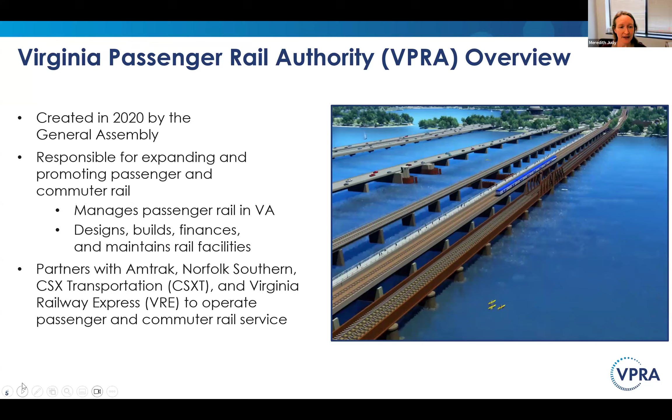Next slide. A main focus of Virginia Passenger Rail right now is what we call our Transforming Rail in Virginia Capital Program. One of the main focus areas is between Washington, D.C. and Richmond. We have 11 major capital projects underway in that segment. With those improvements, we'll be able to provide significantly more rail service, more rail opportunity, and also create more dependability in the schedule. Today, we'll focus on two of those projects, the Franconia Springfield Bypass and the Franconia to Lorton Third Track. And of course, we have Jason here today talking about Virginia Railway Express's Franconia Springfield Station project.

Virginia Railway Express is a key transportation connector in our region. It has two lines, the Fredericksburg line and the Manassas line, with 16 daily trips on each corridor. It connects our Northern Virginia communities into the commercial core in DC. Next, I'll pass it to Geoff.

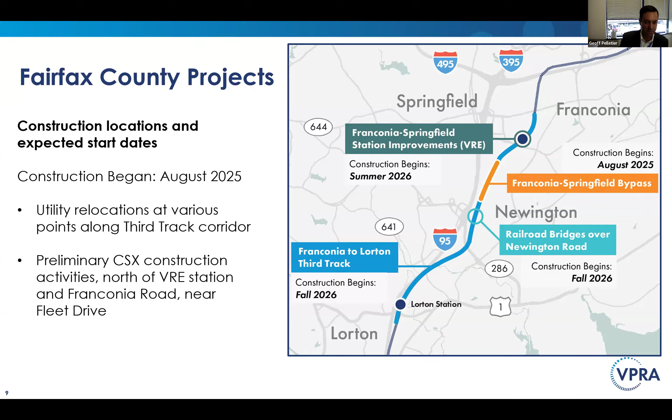We do have elements under construction on the bypass and third track projects. Much of that early work is focused on things like earthwork, grading, drainage, and stormwater protections. That gives us the foundation to build our bridges, our walls, and ultimately the track structures.

The early work underway at Fleet Drive is part of the overall plan to retire the Ravensworth interlocking. That's a network of crossovers, switches, and signals that exists behind the Loisdale Estates neighborhood, which we plan to move up north and convert back to straight track behind Loisdale Estates.

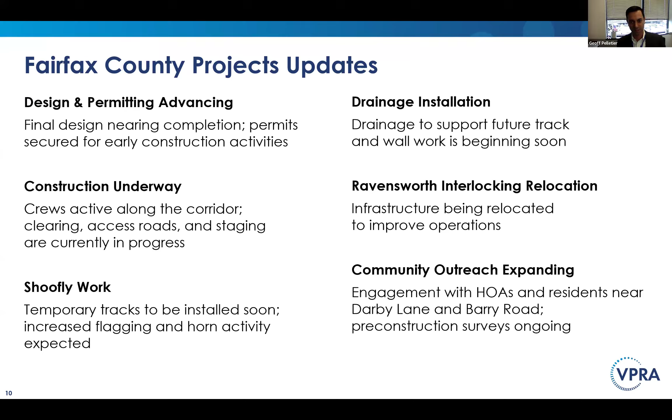We're going to continue our community outreach in the corridor. That includes this meeting, engagement with the adjacent neighborhoods, and in some cases, direct coordination with the homeowners immediately adjacent to the work.

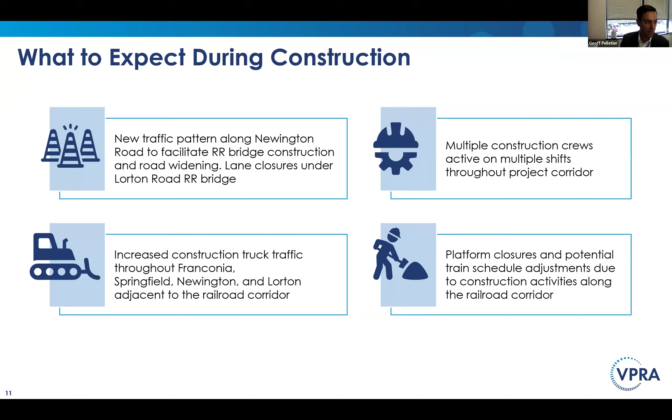We expect to start construction on temporary tracks known as shooflies in the next few months. Adeel is going to describe those in more detail in just a minute. Those of you who live close by will see a lot of earth moving and grading happening in the near term, as I mentioned.

We'll be working on some retaining walls in the corridor, and we've actually started some of that work just adjacent to Loisdale Estates. I was out there yesterday, and we saw some of that work going on.

Throughout construction, we expect there will be a good amount of work in that Barry Road cul-de-sac area, not just for construction access, but there actually is permanent construction work that will take place in that area. We're going to be relocating a sanitary sewer that crosses the cul-de-sac.

We have a retaining wall that will be supporting the future third track in that area. And VRE is going to be constructing a pedestrian tunnel to access the new reconfigured Franconia Springfield station.

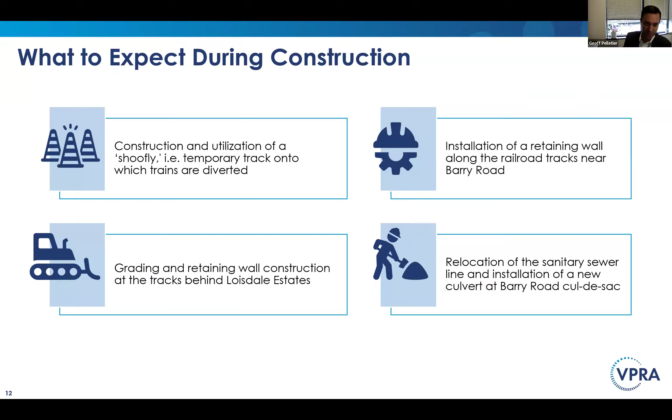Since the initial CAG meeting in August, we've ramped up our community outreach this fall. We did neighborhood tabling events at Windsor Estates and Loisdale Estates, a public meeting for right-of-way acquisition for the third track project, door-to-door flyering, direct mail distribution, and we're in frequent contact with Supervisor Lusk, Supervisor Storck, and their teams. We will continue our outreach in the coming months, and we're always available if your organization or neighborhood has questions or concerns.

We can't deliver these projects without coordination from our partner stakeholders in the corridor, including VDOT, WMATA, Fairfax County DOT, Fairfax County DPW, and the Fairfax County Park Authority. At a minimum, we're talking to these organizations monthly, sometimes much more frequently. In fact, just about an hour ago we had a meeting with Fairfax County, and we've been talking with VDOT all week to try to finalize our plans for the Newington Road bridge replacement. So a lot is going on at all different ends of the outreach effort.

So with that, I'm going to step aside and pass to Adeel. He's going to talk about the bypass project and some of the specifics about our railroad work zone safety.

Geoff mentioned a shoofly. So what is a shoofly? The easiest way to describe it is basically a detour. Unlike road detours, you can't just take another street with the railroad. So what we have to do is build these temporary tracks, shown in purple or pink, adjacent to the existing track, to basically detour the trains around.

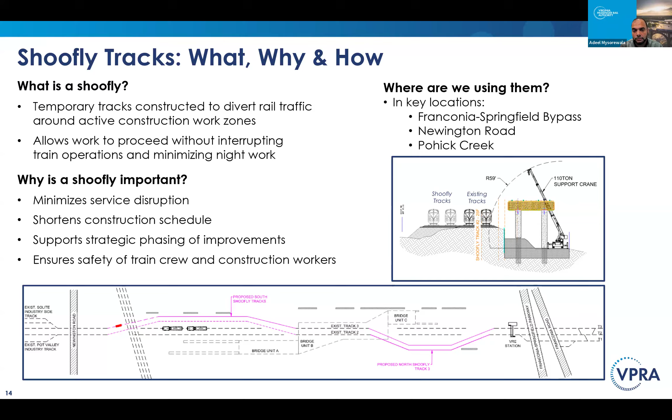As Geoff mentioned, construction has started. You'll hear construction happening, primarily trucks coming in and out of the site, like at Barry Road. Excavation is starting, so they're going to begin taking soil out of the site. You'll hear excavators, you'll hear bulldozers, and we'll be drilling very soon, so you'll start hearing that as well.

And then, just on a construction site, there will be trucks with their backup alarms. We have what these noise levels sound like shown on the screen, just to give you an idea of what it will be like out there.

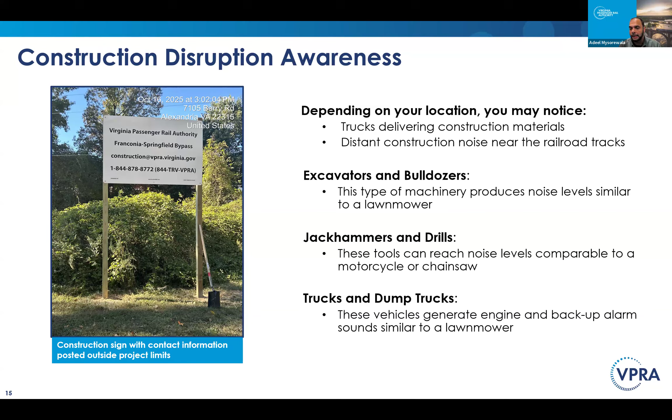So we want to talk about safety in the work zone and the impacts to the community due to safety in the work zone. It's a federal requirement that we follow to provide safety in an active railroad corridor. This means we have a flagman on site managing train operations in the construction area. His job is to ensure safe operations through the area, making sure equipment is out of the way of the train when it passes through. This is required by federal law. The goal is to ensure safety when crews are working near active track, while maintaining train operations.

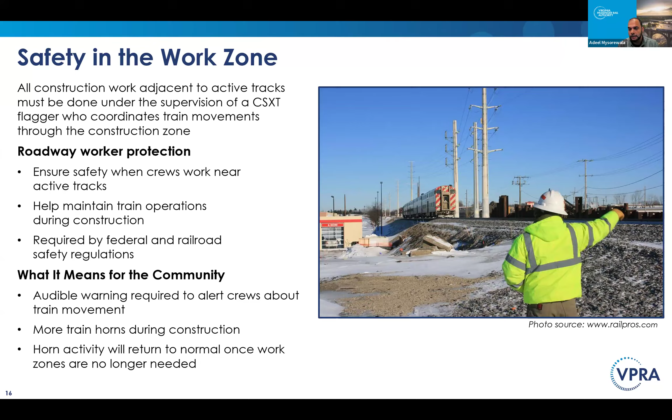We don't want to delay trains, because a lot of people use these trains to get where they need to be, and a lot of goods travel through this area. For the community, part of this regulation means trains have to blow their horn when they go through this area. So you're going to hear more horn noise when work is ongoing. You've probably noticed that already, right? These horn noises will go back to normal when construction is complete, or when the flagman is no longer needed.

So a quick update on the project schedule for the bypass, and then I'll hand it over to Sarah to talk about the Franconia third track. For the bypass, like I mentioned, we're already in construction. Contractors have mobilized, and I'll talk a little later about what's actually ongoing on the bypass project. Thank you, Adeel.

Regarding the Franconia to Lorton third track, as you can see on this calendar, we've just finished our 100% design. We're currently working on information for bid documentation, which I'll touch on later. The big piece we're working through right now is property acquisition, and we're hoping to move into procurement in early 2026, then eventually into construction, which should be completed by the end of Q1 2029. Right now we're closing out our permitting requirements and some pre-construction activities for this project.

Just a quick reminder about what Franconia to Lorton third track is, for those who may not have been at the first CAG meeting. It's the construction of an additional 6 miles of a third mainline track between Alexandria and Lorton. It will create a continuous third track corridor, allowing for more train traffic to occur. As part of that, there will be construction of railroad bridges over Newington and Lorton Road, and other infrastructure like drainage facilities to accommodate the additional third track.

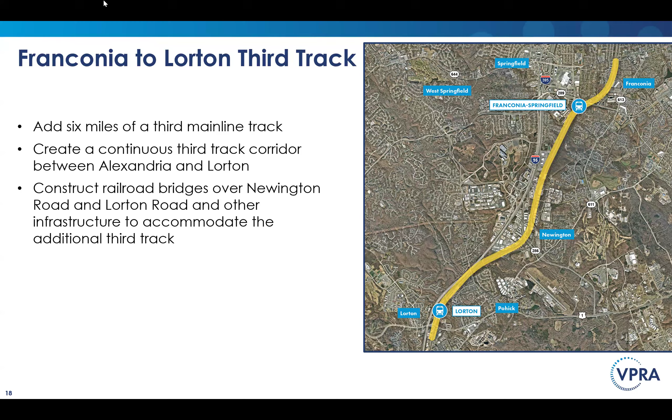It's showing that it's... Oh, it switched on my end. Okay, I just would—

Thank you. So to touch a bit more on the railroad bridge improvements I mentioned, there will be new construction at Newington Road and Lorton Road. Two other bridges being improved are across Accotink Creek and Pohick Creek. For Newington and Pohick Creek, we are constructing a new railroad bridge adjacent to the existing one, and we are also removing and replacing the existing railroad bridge — a full tear down and replacement.

At Accotink Creek and Lorton Road, we are building a new railroad bridge adjacent to the existing railroad bridge, so those involve a little less work.

For a progress update on Franconia Lorton third track, we currently have field crews out and active on the corridor, specifically tied to our early works package. These are not specifically for third track overall, but prep work needed for us to facilitate the construction of third track. So you may notice increased activity, specifically track and signal equipment installation occurring in certain areas.

Recently we completed our 100% design comment resolution phase. We've finalized our plats for right-of-way acquisition and are currently working through the appraisal process. We also completed, as part of the early works package, some drainage and grading civil work. What we currently have ongoing is appraisals.

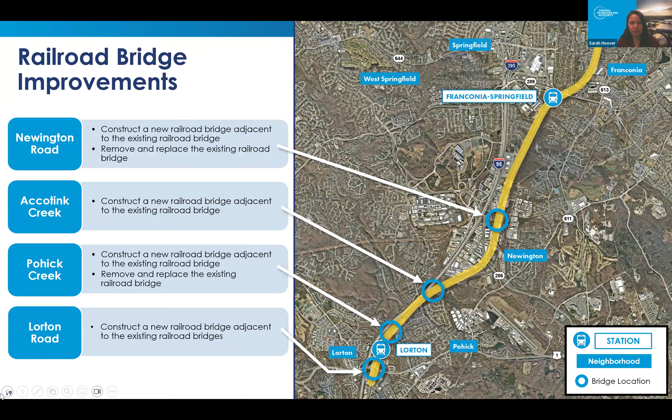As I mentioned, we have an early works package currently underway. We're working with CSX to remove an existing interlocking at Ravensworth, near Jerome Street and Darby Lane. We're relocating that interlocking to milepost 99.5 on the main line, called Control Point Beltway or CP Beltway, near Fleet Drive, north of Franconia Road. That interlocking is a rail junction where tracks merge, with numerous switches and signals being installed, allowing more train movement between the first, second, and eventual third track. This is needed for safety improvements and operational efficiency, so we can take advantage of the third main line, and to allow for the shoofly construction mentioned earlier.

As I noted earlier, that civil work has already been completed. That is what I'll show you in the next couple of images.

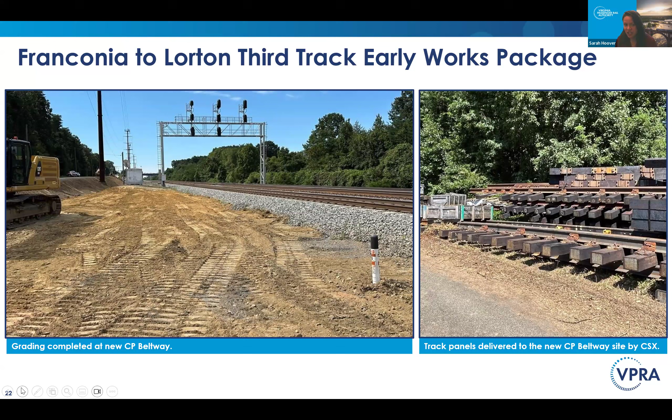For those of you near Fleet Drive who've seen construction in your area, this is what you're seeing. On the left, we have grading that's been completed near the new Control Point Beltway. On the right, we have switch or turnout panels delivered as part of the interlocking construction. They haven't been assembled yet, just staged there for construction in January.

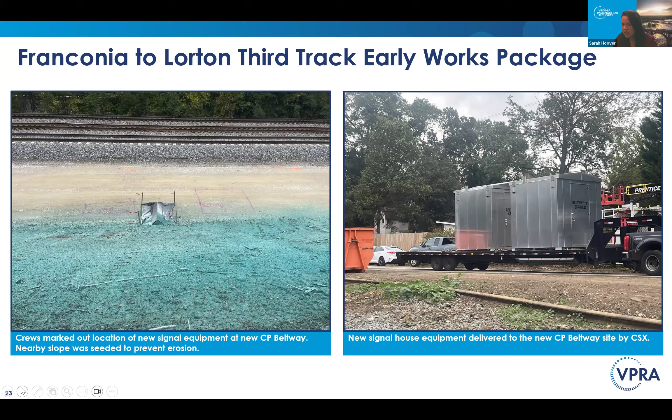We also have signal work, as mentioned. On the right is the signal house equipment being delivered, and you can see where crews have marked the location in the field for the new installation. We've also been seeding the nearby slopes where civil work occurred, to minimize erosion to the best of our ability.

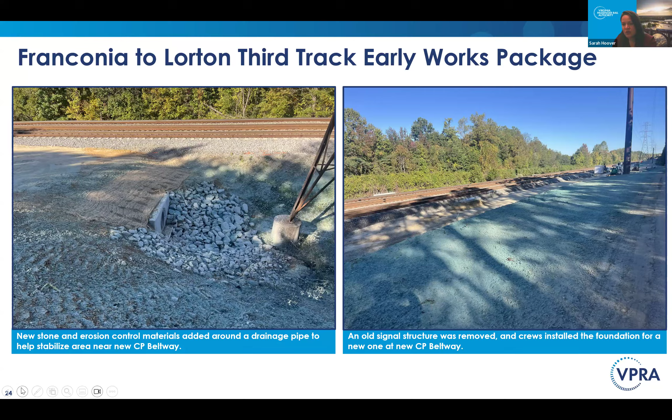So those are the updates for third track. I'll go ahead and hand it back to Adeel to discuss the bypass.

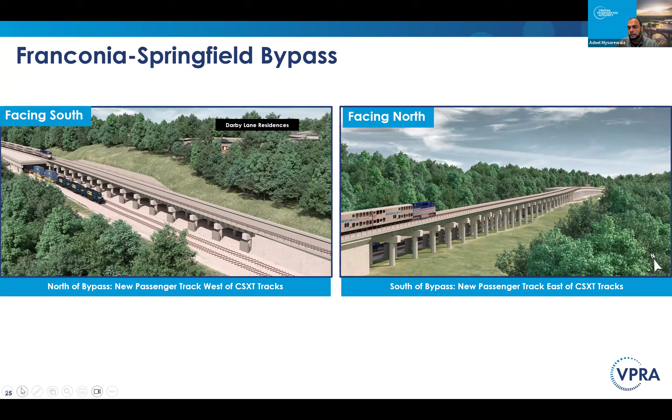As mentioned, we are in construction right now. The contractor has mobilized and gone through initial site setup. We've had kickoff meetings with the Department of Environmental Quality, and a site walk with them as well. Access road construction has been completed, and we're finalizing final engineering plans for the project.

Ongoing right now: brush clearing, site survey, erosion sediment control installation - I'll have pictures to show you what I'm talking about. We have utility relocation coordination ongoing, as well as a lot of equipment and delivery happening right now, and construction of railroad crossings for access. I have pictures of that as well later.

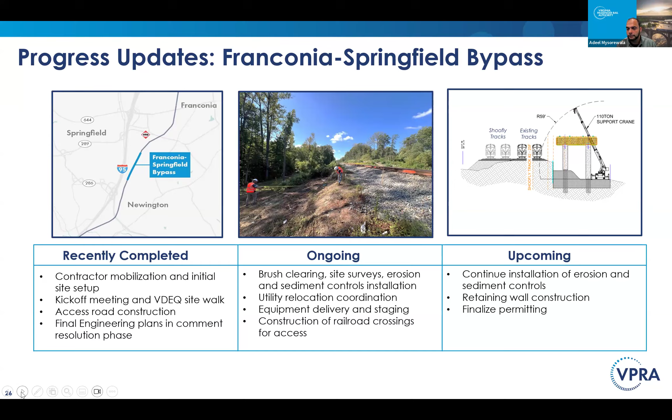What's coming up: we're going to continue installation of erosion and sediment controls, and the major activity you'll start seeing is retaining wall construction - the excavation for that has already started. We also have to finalize permitting for our final engineering phase as well.

So I wanted to talk a little bit more about construction access at Barry Road. I know it's a very busy slide right here, so I'll describe some of these colors.

The orange is the construction access that our contractor is currently using for the Franconia Springfield bypass project. What they're going to do is build a new culvert and then switch over to the blue access path, which provides better access and avoids that sharp turn we have.

Also, VRE is going to come in next and start building the pedestrian tunnel shown in purple. They're going to need that access, so we'll be out of their way so they can start accessing for that pedestrian tunnel construction. In red is the future FCDOT Cinder Bed bike path that's going to come last after we're all done.

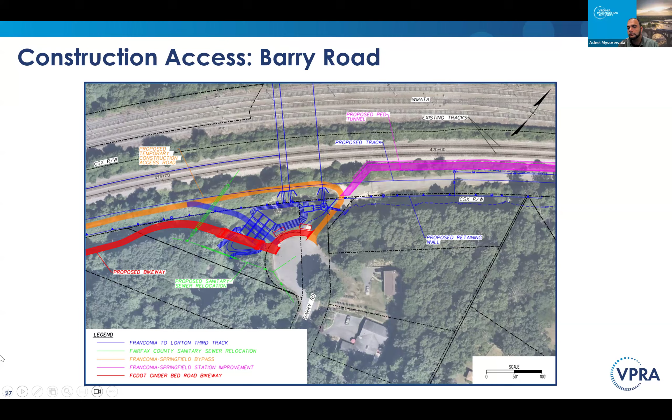Next slide. So just some pictures of construction that's completed or ongoing. On the left is a surveyor out there surveying. They've staked pretty much the limit of disturbance and are identifying where everything is. We're also doing locating underground utilities right now.

On the right, erosion sediment control measures being installed. You'll see that black fabric on both sides of our construction limits. Next slide.

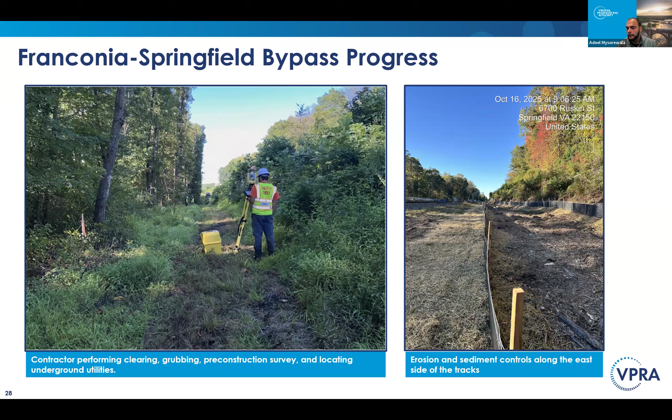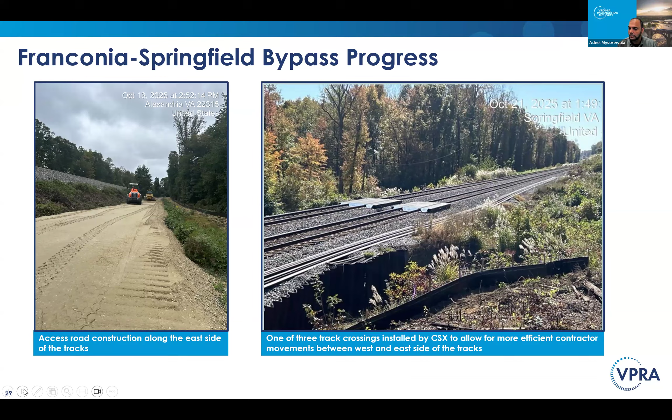Access road that was constructed on the left - there's a bulldozer pushing dirt around, and compaction happening as well. On the right-hand side, you'll see part of the grade crossing we were mentioning. CSX has come in and installed what needs to be constructed around the tracks, and then our contractor needs to finish up the rest of the grade crossing there. Next slide.

And I'm going to hand it over to Jason for the VRE project. Good afternoon. So up here we've got the schedule for the Franconia Springfield Station Improvements Project.

As you can see, we are wrapping up final design. We've just received 100% plans last week, and we are routing those through VPRA and CSX for final stakeholder review, concurrence against their larger adjacent projects. You heard Sarah reference that their project is 6 miles long - ours is maybe about a quarter mile within that 6 miles.

We'll also be using those same documents to finish obtaining all of our necessary permits and things like that. We are starting to work through getting our project documents ready for advertisement for an invitation for bid for contractors in early 2026. Next slide, please.

So what does the project include? It includes largely expanding our existing platforms to be long enough to accommodate 8-car train sets. On the west side of the corridor adjacent to the WMATA station, we can only open 2 doors at a time. On the east side, we can get about 5 doors, but by expanding it to be able to open all doors, that shortens our dwell times and increases operational flexibility.

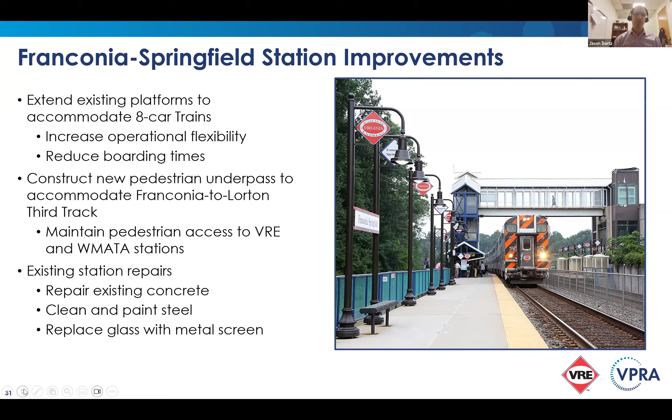Next slide, please. So this is just a top-down view of the same station. In yellow is the existing footprint. You can see on this top side, closer to WMATA, that platform is very short, so we don't get a lot of doors open on that platform. We'd like to rectify that, and we'll be doing the same on the east side to a lesser extent.

In green is the new pedestrian underpass - it will start as a ramp at the end of the platform and work its way down towards Barry Road. And you can see in the light blue running across just beneath that is the new 3rd track.

We will be maintaining access for pedestrians and cyclists throughout the construction period. There may be periods where we're putting in a temporary access road parallel to the existing one, widening it a little to maintain that connectivity. But there will be continuous access through us over to WMATA.

Jeff made reference to potential platform outages. Just want to clarify that we may have one platform out while maintaining service on the other, but we will be maintaining service throughout. We will not be closing the station for any period of time, but it might be that we're predominantly boarding on one platform versus the other.

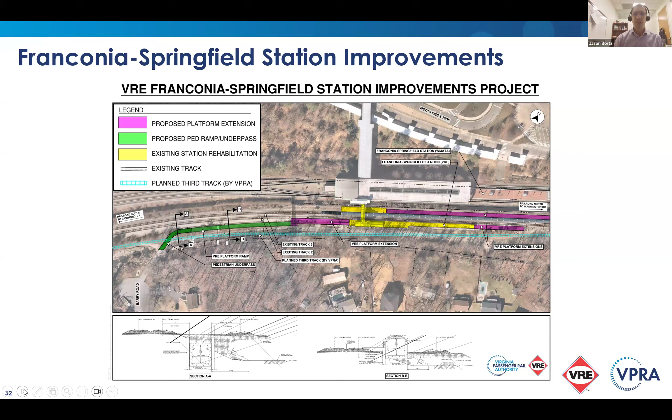This is just to help visualize what the tunnel looks like. If you look at the photo in the top right, it starts with ramping up towards the platform, and you have these large protective walls on either side to support the railroad tracks. As you get deeper, it ultimately becomes a covered box, shown in the top left. That's the section where it is crossing underneath the track, so the track is above the tunnel.

What's not included in the rendering model in the bottom right is that once that box goes in, there will be additional fill material brought in on either side of it to put in the additional track. If you look at that top right visual, the two existing tracks are on the left, the new track is on the right, and they're about the same height. If you're familiar with walking out there, or look at the photo in the bottom left, you can see that service road is much lower than that track, so there will be some fill coming in to bring it up and over.

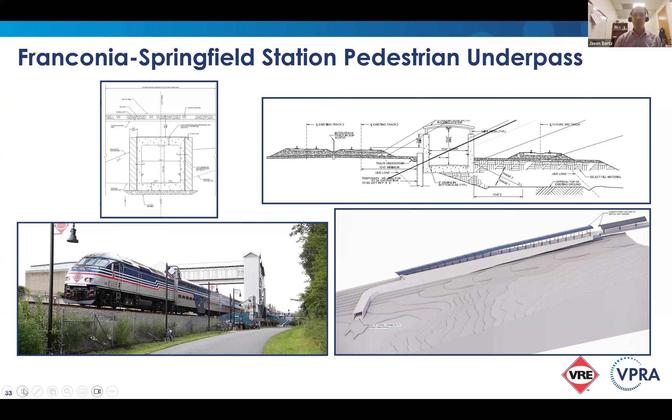Next slide, please. And I'll turn to Jerica.

As the team has mentioned, we are advancing some critical major construction, not just here in the Franconia and Fairfax area, but to the north in DC with our Long Bridge project. That project will have some service impacts beginning in January. We have, over the last several months, been working closely with our partners VRE, Amtrak, and CSX to ensure that we are maximizing the most service and optimizing performance for all of these operators.

But we will have to carve out a work window for some productivity for our teams due to DC noise and vibration constraints. There's also some space constraints within what we call Long Bridge North, the DC part of the project. We have carved out a schedule that we are working with our partners to finalize.

There's also work in the Northeast Corridor with Amtrak and at Washington Union Station that requires some adjustments for service, and we are finalizing that schedule as well. There won't be as much impact to VRE service as there will be to the Amtrak Virginia schedule. We are finalizing those schedules as we approach January, but wanted to, because this is such a critical group, put this on your radar.